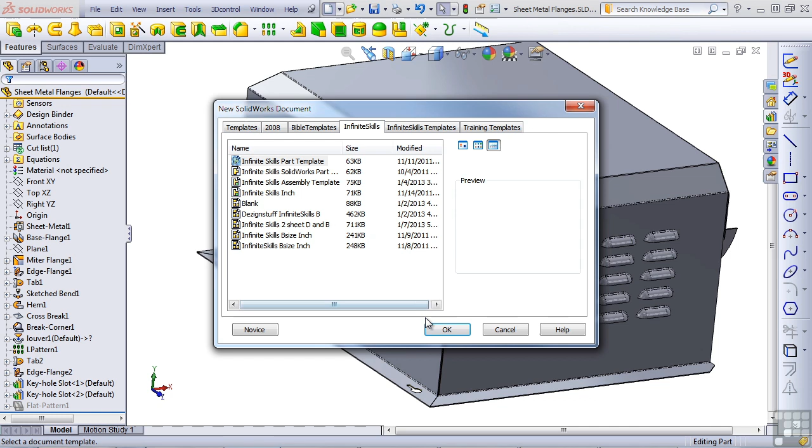Just use one of your Infinite Skills part templates. And now on the front plane, open a new sketch. This forming tool is going to be a tab, and I'm going to start with a center line that starts at the origin and goes straight up.

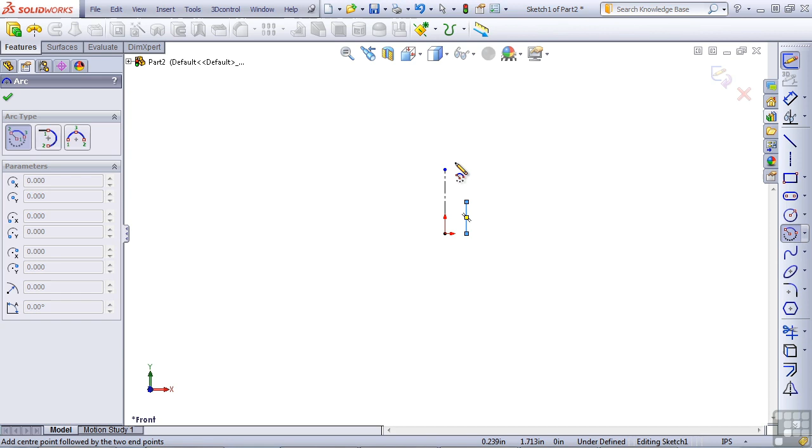From here, I'll draw a straight line right next to the origin, and then I'm going to use the center point arc to sketch an arc where the center is at the end of the center line, and I want to make the other end point at the end of the straight line, and then drag around until you get the stop at the top of the circle.

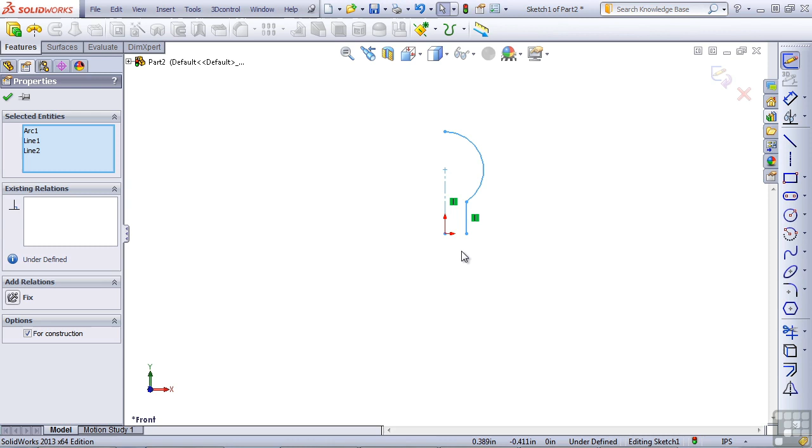Now press Escape to get out of the sketch tool and drag a box to select all of the sketch items. This selects the straight line, the arc, and the center line. With the center line selected, click on the Mirror Entities button.

And now we need to close the shape up with a straight line. And again, Escape to turn off the sketch tool. I'm going to select the straight line and the origin to apply a midpoint relationship. So now my bottom line should be black.

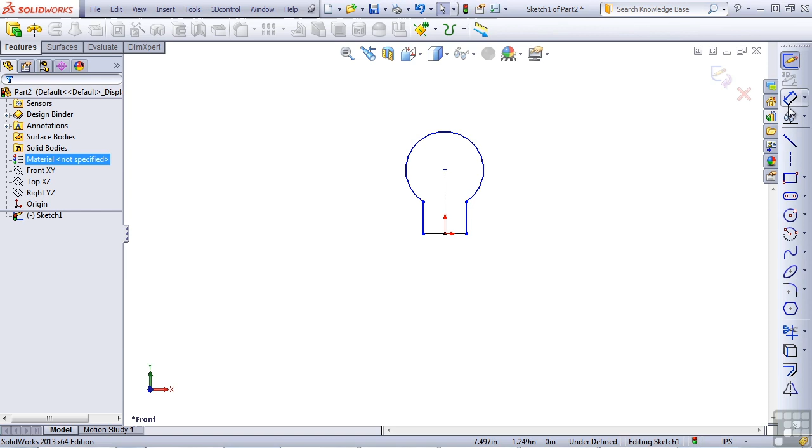Let's add some dimensions now. This bottom dimension should be 1/4 inch. This dimension on the side, 0.2. And the dimension from the origin to the center is 0.5.

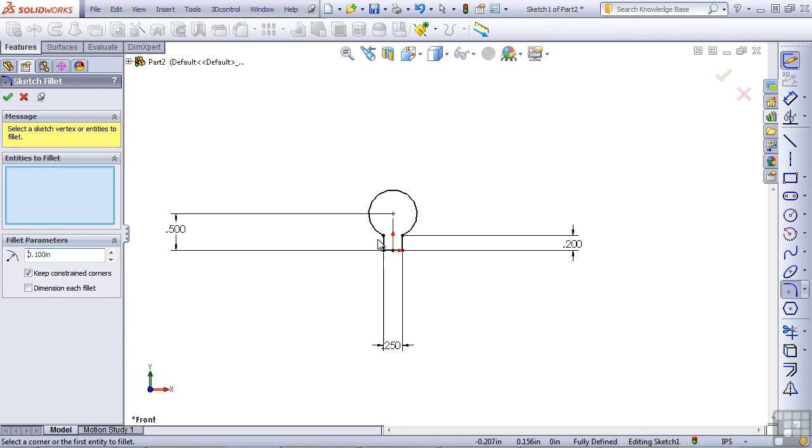I'd like to also add some sketch fillets while I'm here. So let's pick up the sketch fillet tool from the sketch toolbar, set it to 0.1 inch, and then click on the 2 sharp corners in the sketch.

From here, I need to exit out of the sketch fillet command with the green check and use the extrude to extrude this shape 0.1 inch. Let's put a little fillet on here as well. On this edge, make that a 0.05 radius fillet.

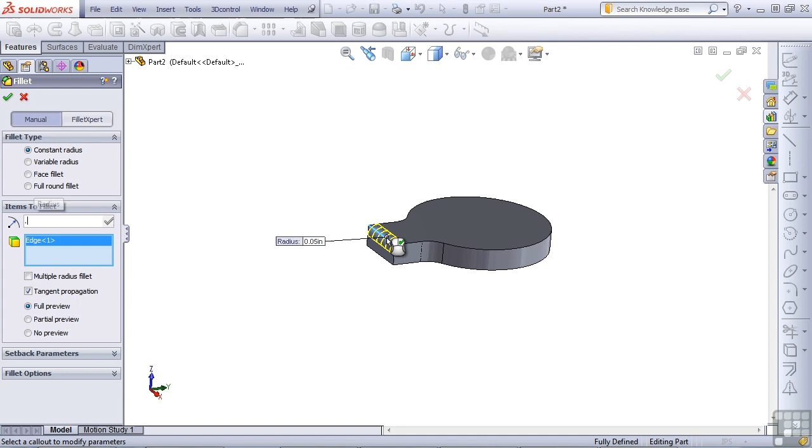We want to make another adjustment to the shape, a little divot on the top of this to indicate that you might push on it with your finger. So what I'll do from here is look at this from the right view. And again, once you click on the right plane, you can hit Control-8 on the keyboard, and SOLIDWORKS will reorient the view normal to that plane.

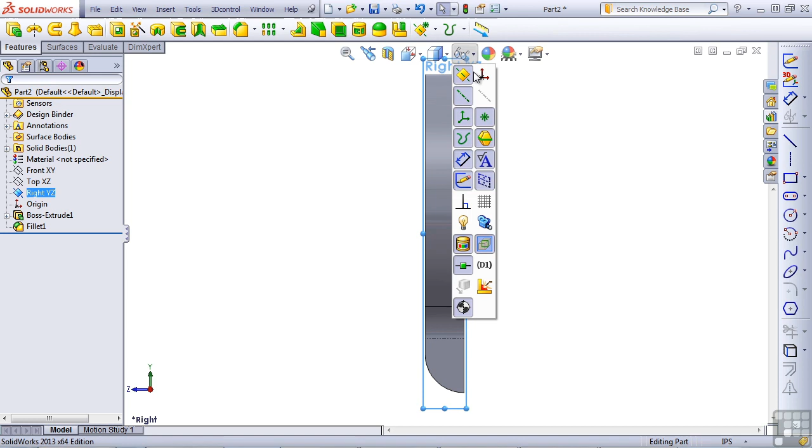Let's turn on the temporary axes. We can see that here. Let's draw a short line right over the top of that and make it end at the top surface of the part, and another line that goes right along the surface.

I see I've missed this somewhat, so let's make that relationship. Click on the point, Control click on this edge, use the pop-up to make coincident.

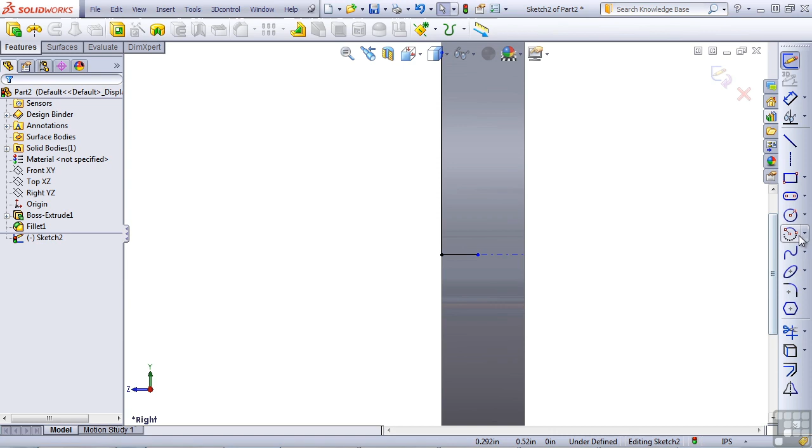Now from here, I'm going to create a 3-point arc. Start from here, click there, and then push the radius. Now I'm going to press Escape to get out of the arc tool because I want to create a manual sketch relationship here.

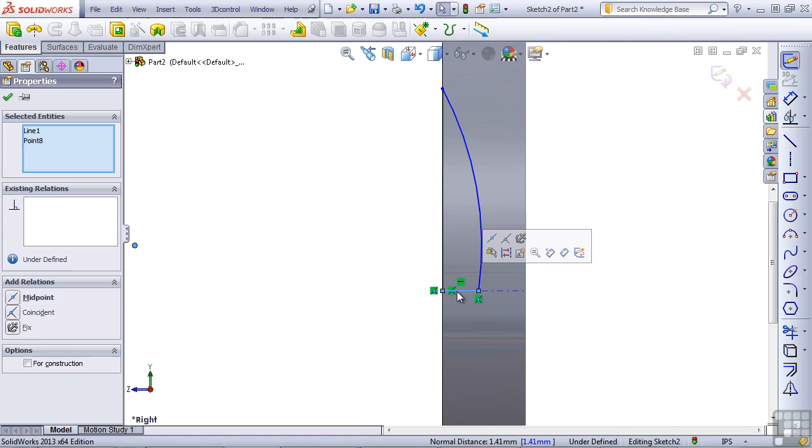The sketch relationship I want to create is between the center point and this line. So I click on the center point first, Control click on the line, and then make a coincident relationship.

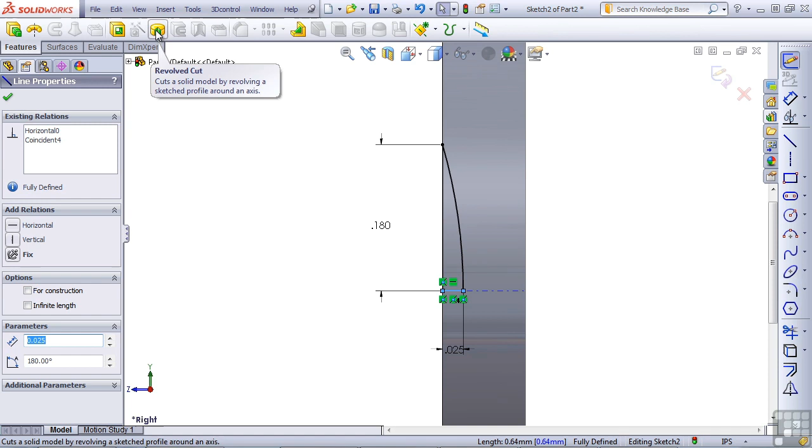Let's add some dimensions again. This dimension is going to be 0.025. This dimension, 0.18. And then press Escape again, click on the short line in the middle, and then select the Revolved Cut feature. And just say OK.

Now when you look at this, we've got a little divot that might make this more comfortable to press with your finger. Let's go ahead and turn off those temporary axes. They get in the way a little bit when you're not using them, so let's just get rid of that. And now we need to turn this into a sheet metal forming tool.

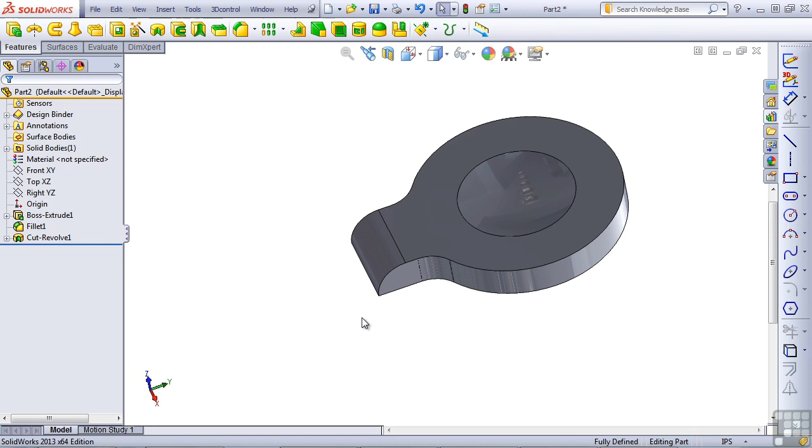One thing I'm noticing is that when you create a sheet metal forming tool, you'd never have a piece of metal come perpendicular right off of the main face of the part. So we need to add a fillet here, but we don't have any material. Here's how we're going to approach that.

We're going to reuse this sketch that we already used for the boss extrude. Let's click on it so you can see it in the preview. The extrude I need to make is slightly longer than this sketch already is, so let's make some changes to it.

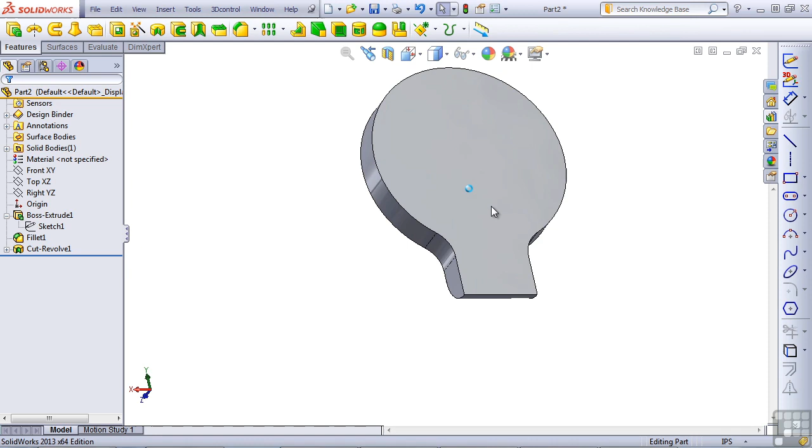One thing I can do is start a sketch on the back side of the part. Just click the face and the sketch icon. From here, I'll click on the sketch in the Feature Manager, then click Convert Entities, which copies that sketch into the current sketch.

Notice everything is fully defined here, and it's all black, so I cannot move it at all. But I'm going to take this bottom line, and notice a sketch relation pops up on it—this is the on-edge sketch relation. I'll click on the symbol and press delete on the keyboard. Even though the line is still black and the sketch says it's fully defined, I've deleted the relationship and can move that line. From there, the sketch turns blue.

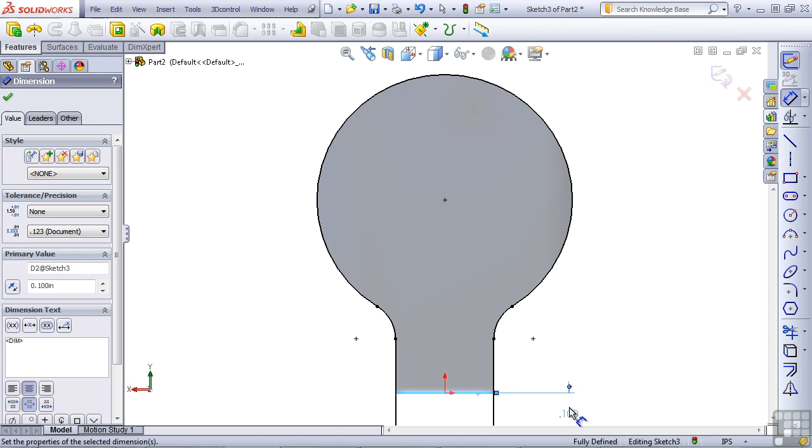Now I can put another dimension in. Let's make this 0.1 inch and extrude this down by some amount—it doesn't matter how much. From here, now I've got material.

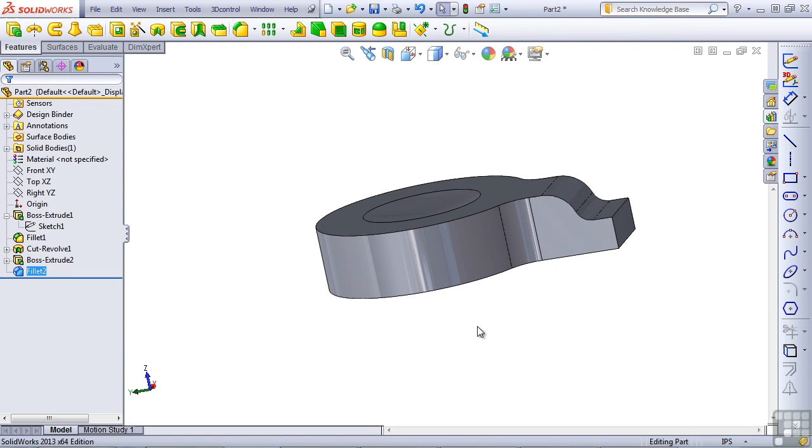I can add my fillet. Let's click on this edge, make that 0.05, and now I've got the fillet in here that I need. But now I have too much material—the material needs to stop at the front plane.

So let's use another tool we haven't seen before: Insert, Cut with Surface. The surface in this case is going to be the front plane. The short arrow indicates the material that's going to be cut away, so let's click OK to accept that.

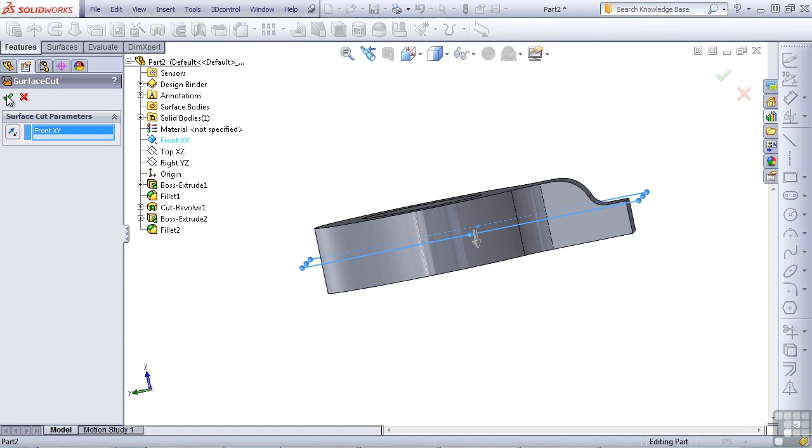Now we've got this small fillet, which will make all the difference in the believability of this feature—it just makes it look a lot more realistic. There are other ways to have done this, probably more simple, but this is one method I chose to demonstrate. A simpler method might be sketching the shape of the fillet with a small line on the bottom and another vertical line, extruding it all in a single feature.

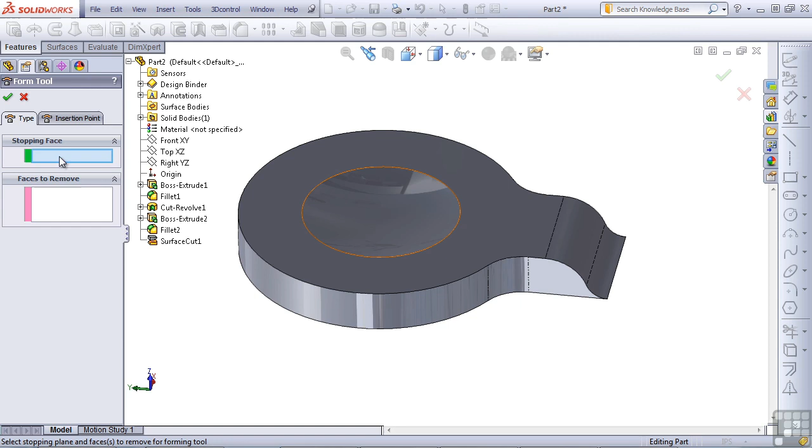But let's go ahead now with creating this as a forming tool for a sheet metal part. To do that, we go to the Insert menu, Sheet Metal, Forming Tool. SOLIDWORKS needs a stopping face, which represents the surface of the sheet metal part, and that surface is going to be right here.

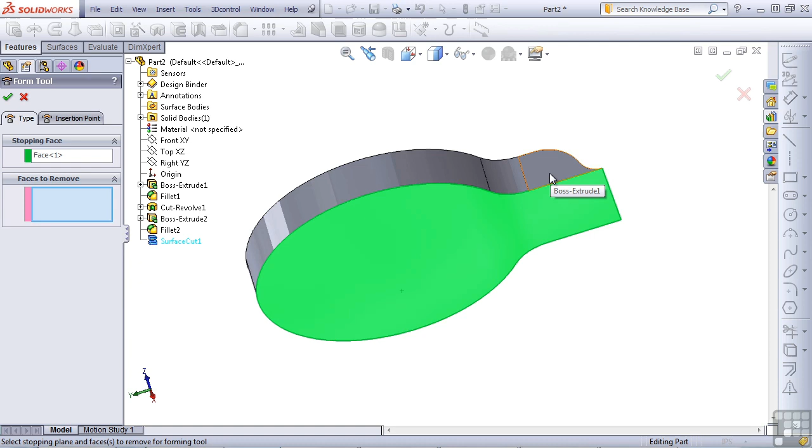Faces to remove is a special selection you won't have on every forming tool, but if you ever want to make a cut with a forming tool, that's what this selection box is for. All of these faces around the thickness of this forming tool need to be removed. One easy way to do this is to right-click on one of the faces and say Select Tangency—that picks all the faces around since they're connected with fillets. Let's press the green check to accept that.

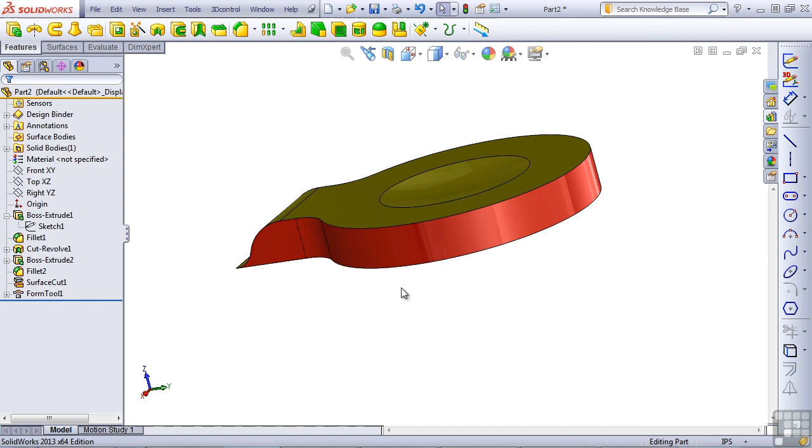SOLIDWORKS has automatically color-coded the faces: teal for the stopping face, red for faces to remove, and yellow for the faces that are going to be raised up off of the sheet metal part.

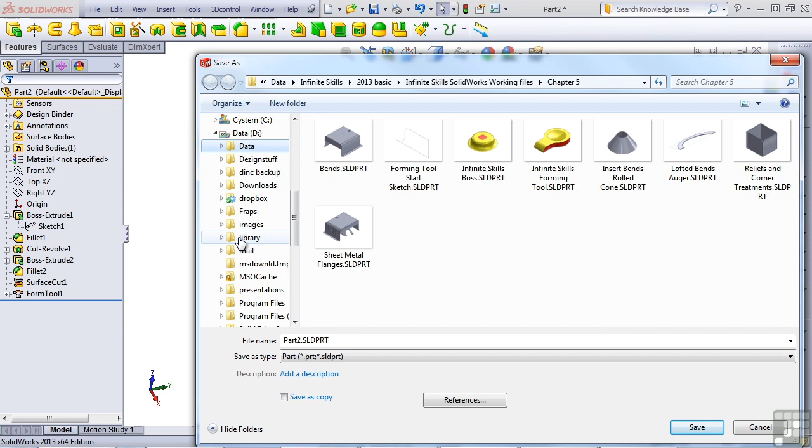Our next step is to save this into a forming tool library. I'll go to File, Save As, and save it to the library folder I've already established on my D drive: Library, Features, Parts, and Assemblies, Forming Tools.

This is something you've already established in your Tools Options settings, in the File Locations area for forming tools. Here I already have one Infinite Skills forming tool, so I'll just name this one number 2. Now we'll flip back to our sheet metal part and actually apply this forming tool to the part.

I'll flip back to the part using the Control-Tab keyboard combination. Your forming tool library will show up in the design library area, with a stack of books icon. Just to show you how I browse to this location, you might have any number of default areas set up by SOLIDWORKS in your library area. But wherever you've saved this particular forming tool, let's browse there. I had it in Features, Parts, and Assemblies, under Forming Tools, and here's my Infinite Skills Forming Tool 2 solid part—this is the one I'm looking for.

I'm just going to drag this from the window right onto the part. This is a little embarrassing—we get an error message instead of a forming tool on the part. It asks, are you trying to make a derived part? Well, no, we're not trying to make a derived part, we're trying to apply a forming tool.

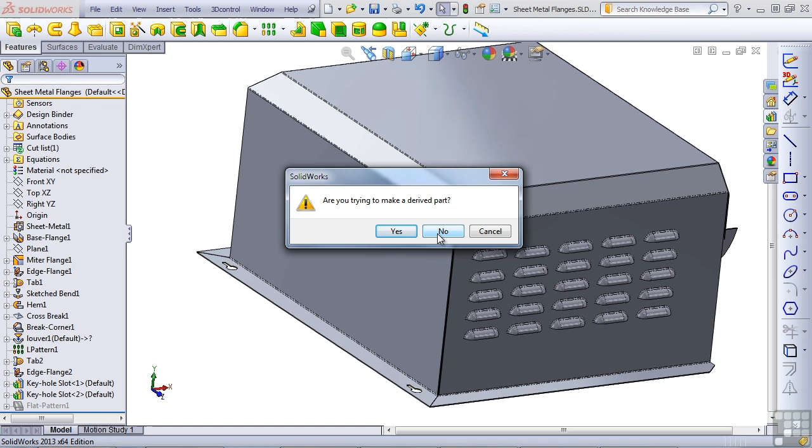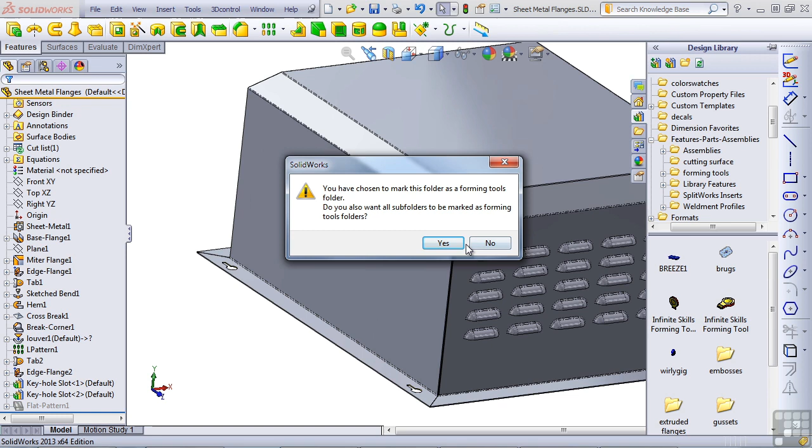So what's happened here is you have to have your forming tool library declared as a forming tool library. Let's close out of the forming tool part that opened up. In order to do this, it's very simple. Let's go back to the design library and find the forming tool folder in the upper pane. Right-click on the forming tool folder and tell SOLIDWORKS that this is a forming tools folder. SOLIDWORKS lets you know you've chosen to mark this as a forming tools folder, and asks if you also want to mark subfolders. We'll say yes to that.

Now let's try this again. Grab the Infinite Skills forming tool and drag it onto your part. Notice you're getting a preview immediately. There are a couple of things you can do here, because you can see how it's being oriented on the part. You can hit Tab on the keyboard, which switches sides of the sheet metal—so in this case it's on the inside, and in this case it's on the outside. You can just switch back and forth.

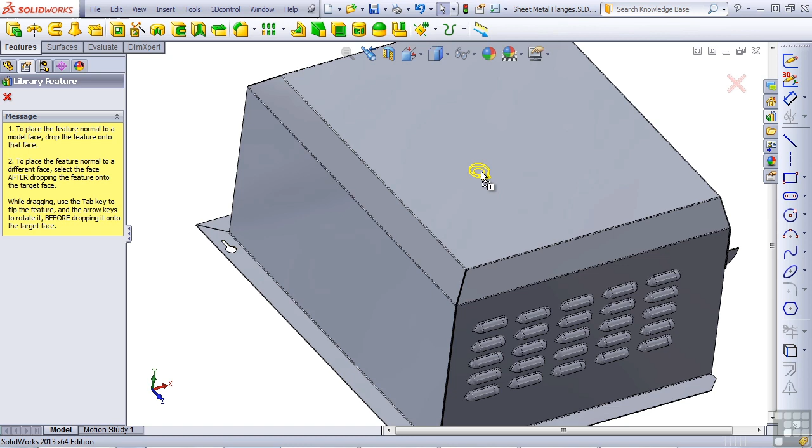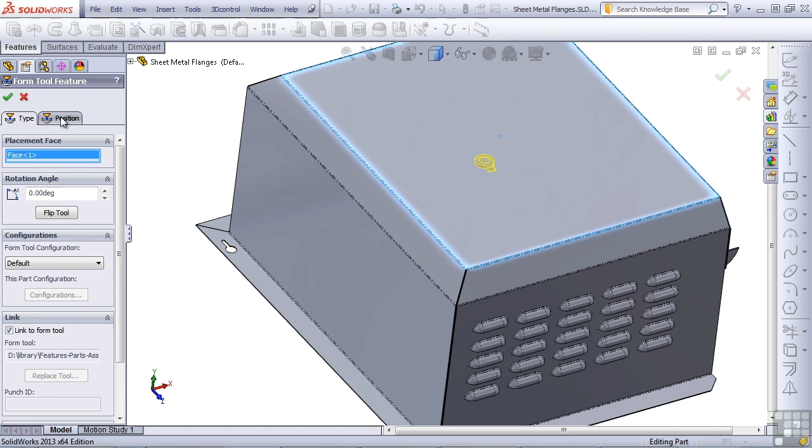You can also use the arrow keys on the keyboard to reorient it, and when you get it in the position and orientation you want, just drop the mouse button. Now you can use the flip tool option in the form tool feature property manager, the same way you used Tab while pre-placing this. You could also use the Position tab to specifically locate it with dimensions, sketch relations, and so on. When you're satisfied with the position of the feature, just click the green check.

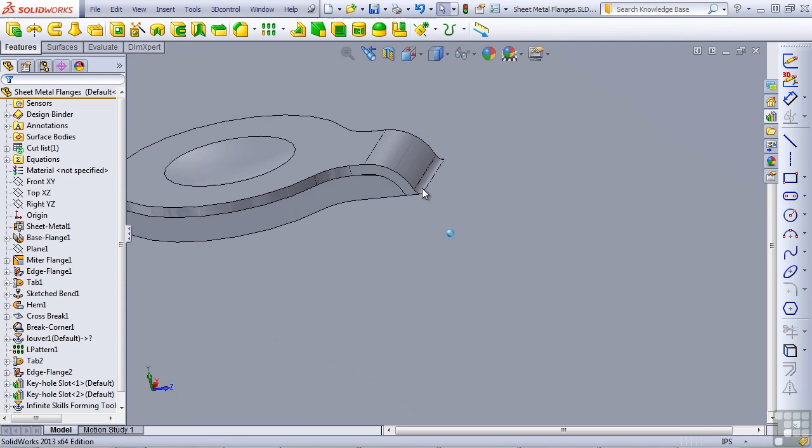Now let's take a look at what SOLIDWORKS has done for us here. Here's the little fillet we talked about before. If we imagine we hadn't put that there, this would have just been a sharp edge, and a sharp edge on a sheet metal part looks pretty unrealistic. Let's take a look at the inside—because we have a fillet on the outside, there's also a fillet on the inside. A sharp corner here would look extremely unrealistic, so I think the fillets just really help it look more like a real sheet metal feature.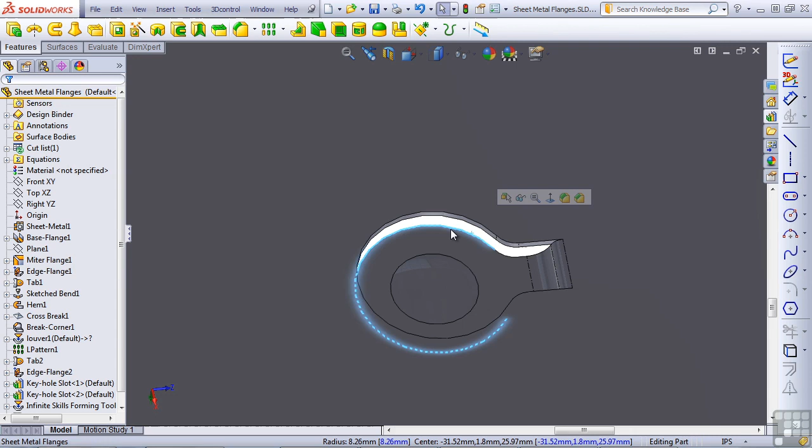Notice we've got a gap around where all the red faces were, and our little thumb indentation has come through the process as well. So that's how to make a forming tool feature in SOLIDWORKS from scratch. If you're setting this up for the first time, don't forget to mark your forming tool folder as a forming tool folder in the design library. Best of luck, and we'll see you in the next lesson.